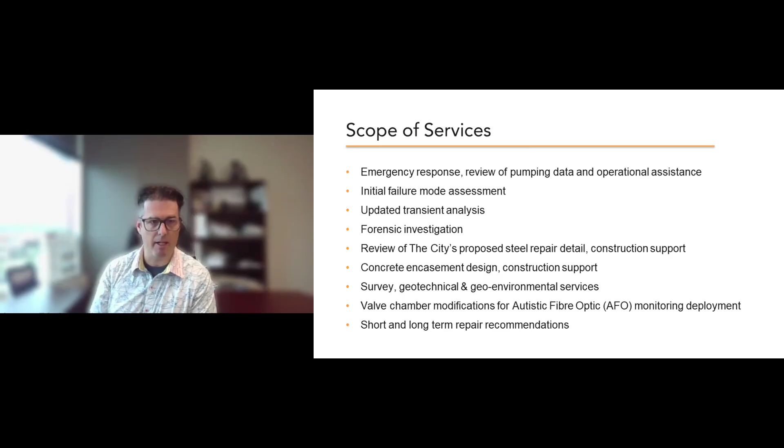Just to give you an overview of some of the key features in this presentation and where this project occurred in general - this is an overview of the City of Calgary. The City of Calgary is serviced by two water treatment plants, Bearspaw and Glenmore, with a combined capacity of about 950 megalitres per day. In general, Bearspaw supplies the majority of the city's treated drinking water, and from that Bearspaw water treatment plant there are three main discharge headers: one to the north, one to the northwest, and the subject of today's presentation, the Bearspaw South feeder main, 1950 millimeter, which roughly connects the Bearspaw water treatment plant and the Glenmore water treatment plant.

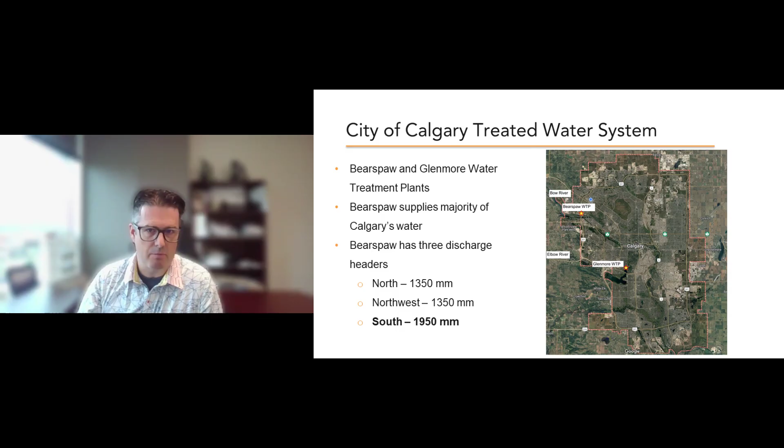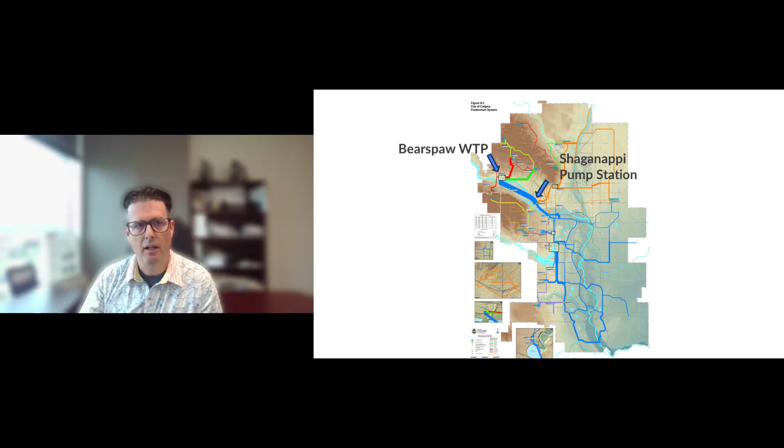This slide is a graphical representation by percent of volume of the overall system. The lines show a graphic representation of how much flow each part of the feeder main transmission system is delivering throughout the city. The Bearspaw feeder main, between those two blue dots, is the largest pipe by volume within the entire transmission network. This is supplying into the Glenmore pressure zone, which covers about 90% of the daily water supply within the city of Calgary. So this would be considered a critical main, a very large piece of infrastructure for delivering treated water throughout the city of Calgary.

Just a little bit more of an in-depth view of the project location. Bearspaw water treatment plant is on the left of your screen, with the red line representing the 1950 or 78-inch Bearspaw South feeder main. A portion of the feeder main is steel pipe, and the other portion we're looking at today is the C301E pre-stressed concrete pipe, which runs for about 8 kilometers through this project area.

Looking at some of the repair locations, the red arrow indicates the June 5th rupture. That was the initial emergency response and the immediate repair to return the system to service. During the initial rupture, other work was proceeding, coordinated by the city, to look into other potential distressed pipes and broken wires within the pipe network.

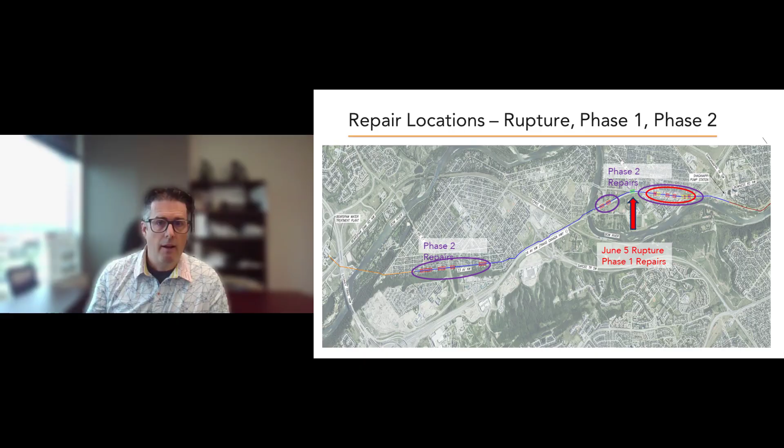This is just a rough overview of the initial June 5th rupture. We then proceeded to Phase 1 repairs, which targeted 5 repairs on another series of pipes demonstrating a large number of wire breaks. Further rollout looked at additional distressed pipes with a large number of wire breaks in Phase 2. Finally, Phase 3 was on the 1500 millimeter or 60-inch section of the pipe, further east of the Shaganappi pump station. This was completed last; 2 segments of pipe were repaired there.

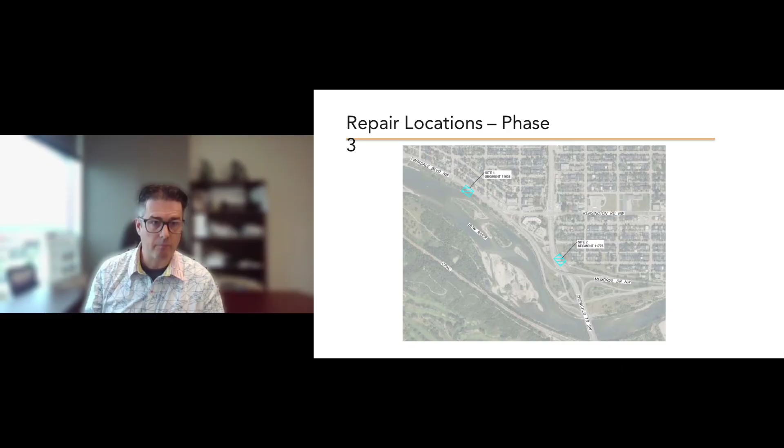Looking at this pipe - this is not the pipe that ruptured, but a typical example of the pipe that is the subject of the presentation. It's C301E pre-stressed concrete cylinder pipe, and this particular pipe was manufactured in 1975.

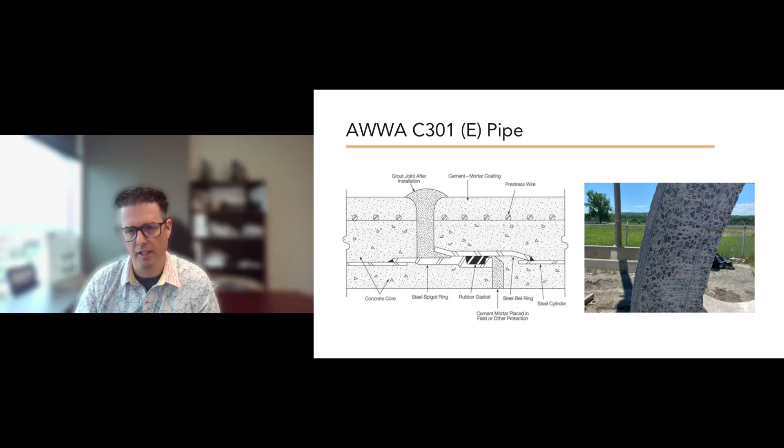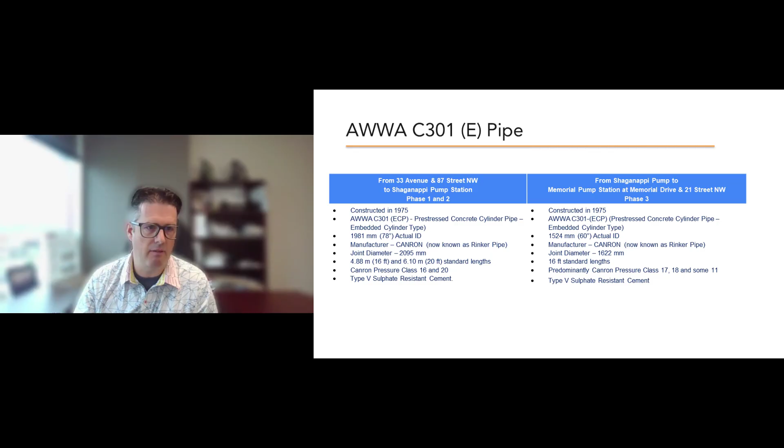Just a little bit more detail on these pipes. Constructed in 1975, the Bearspaw feeder main - the main portion - is 78-inch, manufactured at the time by Canron, and there's also the smaller diameter pipe further to the east, the 1500 mil, 60-inch Canron PCC pipe, supplied in various lengths.

Getting into a little bit more detail on the June 5th rupture: on the afternoon of June 5th, I recall leaving a golf tournament, and some interesting tweets started hitting the news - X posts showing murmurings that something was going on in the system, something not like your typical water main break. On June 5th, there was a catastrophic event that caused a rupture in the Bearspaw South feeder main. AE was contacted by the city, and we were able to attend site immediately and start supporting the city in trying to determine what happened, and supporting the investigation and repairs.

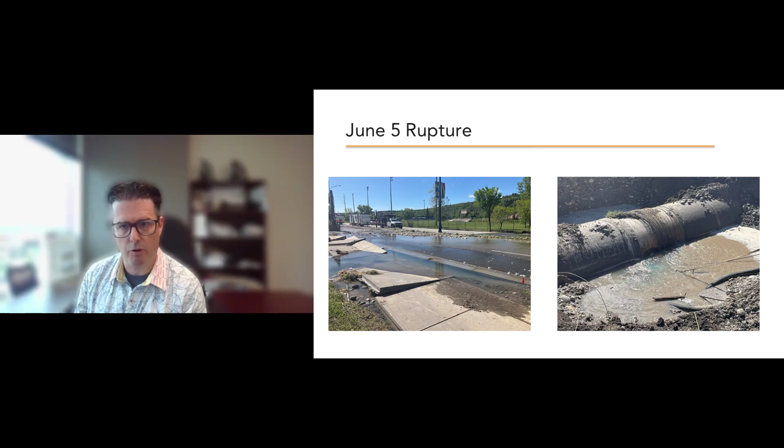These pictures show 16th Ave with the water surcharging to the surface, and also a picture of the distressed pipe with the rupture. Once all the water got pumped down, we started getting in close up to the pipe, looking at the wire breaks, looking at the damaged section of pipe, and starting to gather information to support the forensics investigation.

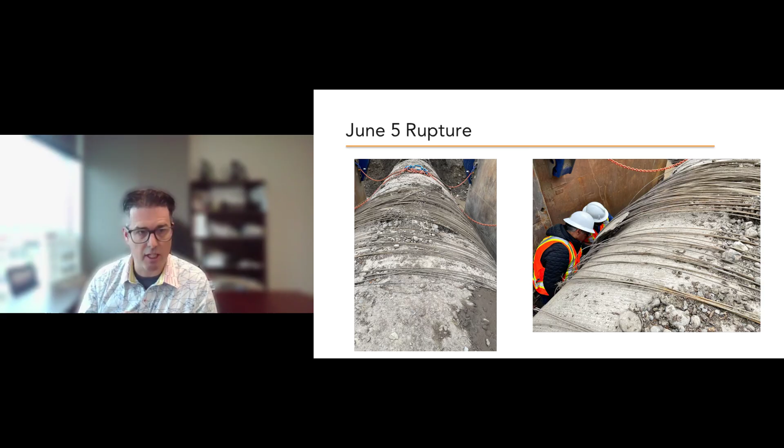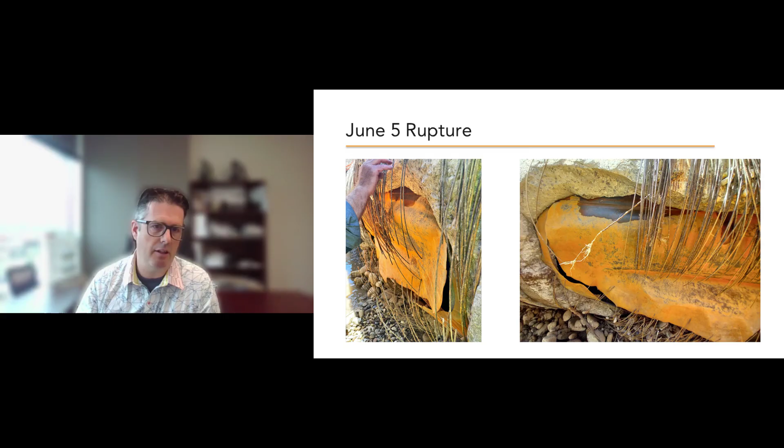Looking at where the pipe failed, we found a crescent-shaped tear at about spring line on the pipe. With the rupture itself, about 200 pre-stressed wires were found to be broken. It's not able to be definitively determined how many were broken before versus how many were broken due to the rupture. But you can see here the rupture from the steel can within the pre-stressed cylinder pipe.

So again, we were able to finally get the pipe out of the ground, looking at it in a little bit more detail here. So this is the pipe segment that ruptured, that crescent-shaped tear just below spring line. This pipe was taken to one of the city's yards for further investigation, sampling the mortar, sampling the steel, doing a full suite of material sampling, so that additional forensics testing could be completed to determine the cause of failure.

In parallel with that, and touching on some of the other support that Associated was providing to the city, we wanted to look into the pump data leading up to the event. Was it a pump failure? Was there a pump that kicked on or off suddenly? Was there a transient event?

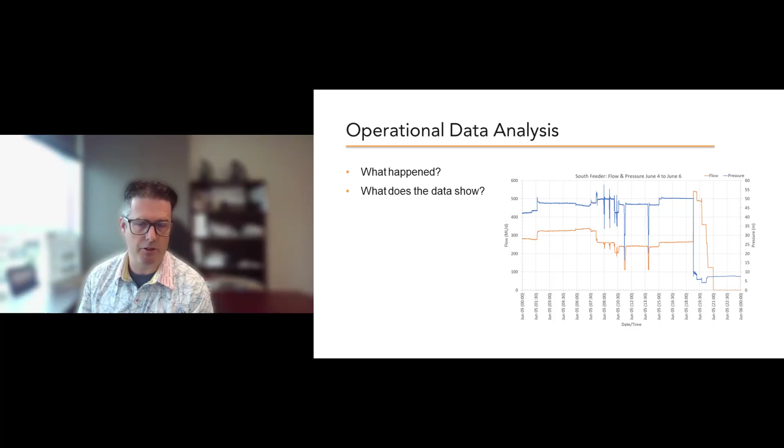So the city was able to provide us their pumping data. Upon review of the pumping and the transient, we were able to determine that the rupture, the June 5th event, was not due to a pumping occurrence or a transient event. So those are some things that we were able to review and initially rule out.

So some of the first very immediate needs, obviously, we needed water. Pretty much immediately, there were water restrictions enacted by the city, but at the same time, we needed to get water into different pressure zones, keep water in the system, keep the taps on to some degree as much as possible.

So with AE's recent experience in the city at Bearspaw Water Treatment Plant, and also Shaganappi Pump Station, we were able to support the city in reviewing bypasses within pump stations. We were also able to leverage our recent experience to get some plans put together quickly and get into construction. And also knowing the system, we were able to install a pressure reducing valve to be able to operate the system in emergency operations.

So on June 6th, we got into Shaganappi Pump Station and were able to identify ways that they could change the operations, run water backwards, if you will, and be able to supply some of the different pressure zones in different ways and keep water going to the pressure zones and the different reservoirs throughout the system.

One of the solutions that we developed in the North Hill bypass, getting water to pump station 32, we actually straight lined a pipe. Normally there would be a pump at this location, but we were able to identify that if we removed this pump and straight piped it through the pump station, we'd be able to run the water backwards and still provide water into one of the pressure zones. So that was leveraging our recent experience and support on a variety of different city water projects.

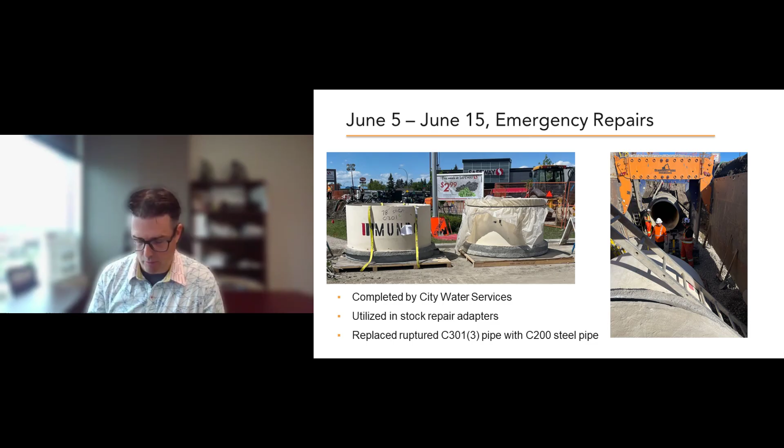While this pipe was out of service, the city also began to collect other information from within the isolated portion of the feedermain. At this time, they were able to deploy Pure Technologies, who did electromagnetic scans of the pipe. During this initial window, the information was collected that indicated there were other distressed pipes with significant amounts of wire breaks within the system. And the city started to develop their plans to complete subsequent repairs on additional pipes.

Once those additional 5 locations were identified, the city developed their own detail that they looked to AE to complete reviews on. This was going to utilize welding donuts into the bell and spigot of the existing C301(3) pipe, and then transition to C200 steel pipe. The supplies for this were all procured by the city.

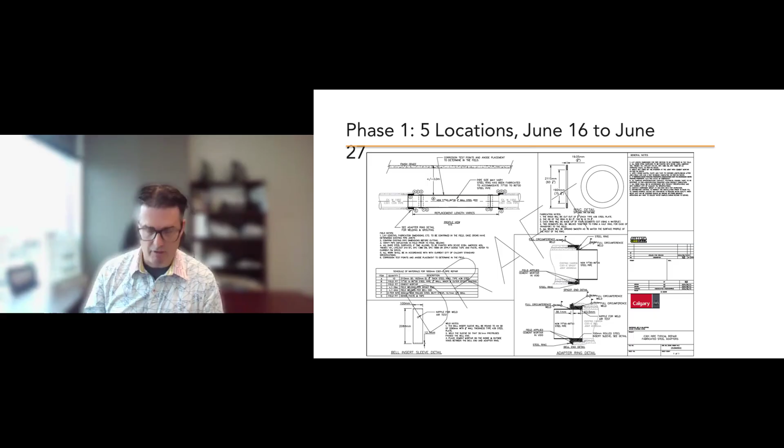As I mentioned, while the initial rupture and the out of service was in place, the city completed electromagnetic scans of the pipe. This was achieved, since there's no water in the pipe, by dragging through electromagnetic equipment by Pure Technologies. And through this, they were able to identify pipes that needed to be repaired based on the number of wire breaks.

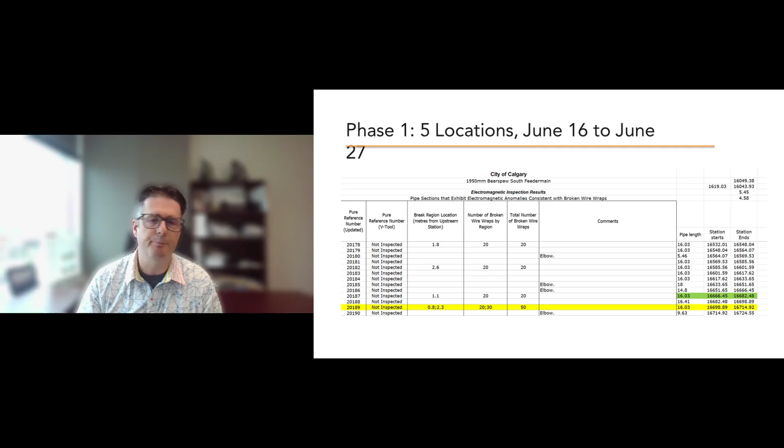Taking this information, AE needed to translate it to the field, right? So this is collected in the ground, but we needed to know, where are we going to go dig? Where are we going to go find these pipes? And so one of our initial tasks was going through. The city did have all the original layout drawings of the Canron pipe that we were able to review and look through the Pure data and correlate drain points.

There were obviously a lot of valves, but there's drain points, other features on the feedermain system, air valves, things like that. And from those points on the lay drawings, the Pure Technologies information, and then field checks, we were able to go out and lay out and say, dig here.

I recall one of the most nerve-wracking things was showing up on June 16th. The city had already lined up all their contractors in place to complete the emergency repairs. They were already digging. They had a rough idea of where their pipes were, but we kind of viewed this as, you only have one chance to get the right pipe. We didn't want to have to dig twice on anything.

So contractors are already on site, asphalt's out, already starting to dig, and we're running up and down the street with Pure, with drone surveys, trying to take the information from these old drawings, which are in feet and inches, the other data that's in meters, and trying to lay everything out and get the pipes right and make sure that we're digging and repairing the correct pipes.

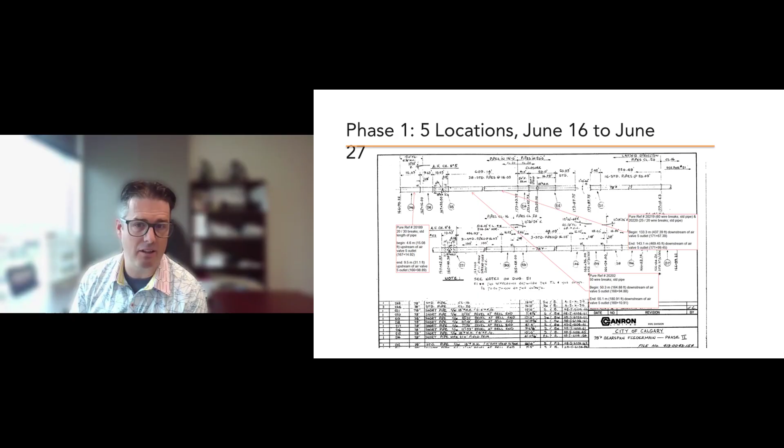Another reason why this initial layout was important was to support our forensics investigation. So we had identified these distressed pipes that were going to be replaced with sections of steel, but at the same time, we wanted to exhume and extract these segments of pipe so they could be taken off site for further forensics analysis. So once we determined which pipes, we also laid out the zones where we did not want any cuts. We wanted to try and exhume these as intact as possible for future investigations off site.

And then you can see here, in addition to doing the survey layouts and things like that, Pure also came back onto site and completed additional EM scans to make sure the number of wire breaks that we were seeing from the internal scans and the pipe diver were matching the signature of the pipe on site.

And through all the phases, there was a total of 3 phases, 29 locations total. We were successful in locating and digging on the pipe 29 out of 29 times. So it was pretty nerve-wracking, but was successfully executed.

Again, supporting the city's forensics investigation, we were completing site observations of the in-situ pipe, making observations, collecting mortar samples, looking at the wires, just trying to collect as much data as possible to help support the forensic investigation into why this might have occurred.

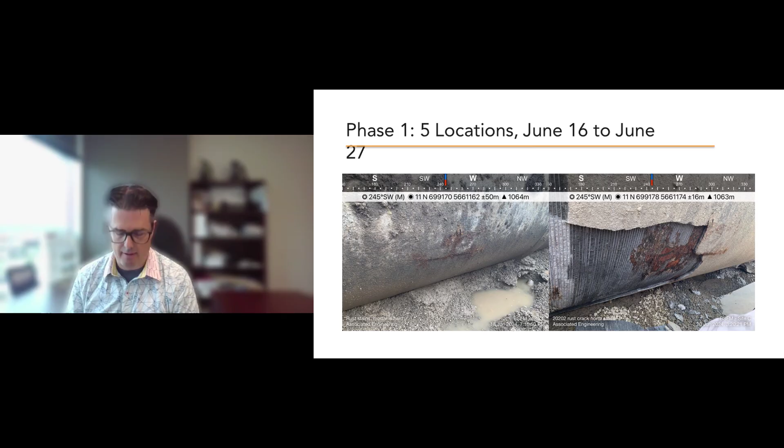In addition to this, Corrpro was on site looking at resistivity, stray current analysis, things like that. And then Thurber was supporting AE as well to collect soil samples for testing for chemical properties.

Looking a little bit more along, when we started to dig out the pipe and get it ready for replacing with steel, one of the things that I learned through the course of this project was the amount of time that it took to chip out these diapers. So the mortar that was applied at the joints, you can see in the lower view of the slide on the left, the concave at the joints, those are referred to as diapers. That was very high strength material. And I give credit to all of the crews, working so carefully to protect these joints.

So they needed to chip out these diapers while not damaging the existing bell and spigot, because that's where we were going to weld the donuts in and weld the steel pipe right into those bell and spigots. So a very careful exercise, very time consuming. This was probably the activity that took the longest.

I think up to 24 to 36 hours to chip out each diaper, multiple crews getting in there, and just really tough work. And that probably took the longest out of any of these site activities.

So once the diapers and the pipes were removed off site, the steel pipe was brought onto site, lined and coated. You can see the adapters that were fabricated, welded right into the existing bell and spigot. So C200 pipe dropped in there. The closure was completed with butt straps. And then in addition to the lining and coating, everything was Densyl mastic before backfill.

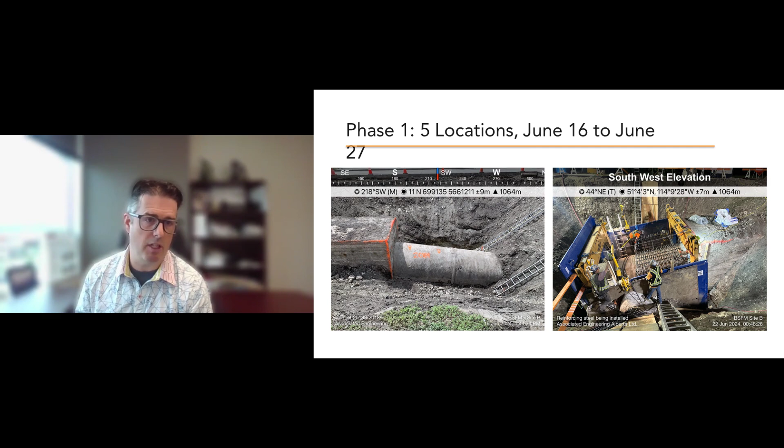And as we move into the phase 2 repairs, this was what we applied for 21 additional locations. So after the initial phase 1 repairs were completed in June, we had time to reconfigure, come up with more plans with the city and their contractors, and starting at the end of August, we deployed to complete repairs at 21 additional locations. At this point, the city brought on Graham Contracting.

So the phase 1 repairs were completed by 4 separate contractors working directly for the city. But for these phase 2 repairs, it's a very wide area, multiple work fronts. You're within residential areas, commercial areas, a very high density urban area. They brought on Graham Contracting to act as a general contractor for these 21 sites for the overall program.

AE's services in the phase 2 repair. As I mentioned, we prepared the concrete encasement details that were going to be constructed around the existing pipe. So we needed to support the existing pipe in place. So we also looked at the support details and how much deflection, we're trying to avoid having any deflection, obviously, but coming up with your minimum deflection and providing the requirements to the contractor to make sure that it's properly supported in place at all times, so the concrete encasement could be constructed without compromising any joints and loss of integrity.

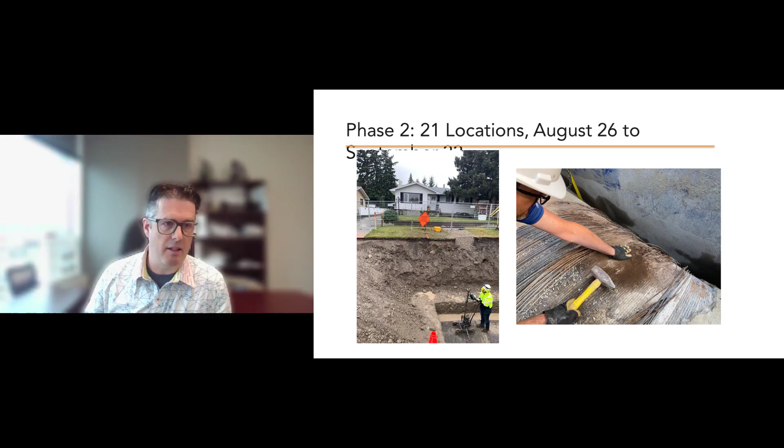We did have a video planned, but unfortunately due to technical difficulties, the video is not available.

Just looking at a bit more detail of phase 2, so 21 locations over a wide area. Graham came up with the work plan to phase and stage all of these work areas. They assigned the work to 4 different civil contractors who were responsible for excavating and exposing the pipe, and then Graham themselves performed the services to place the rebar, place the concrete encasement, things like that. The shoring system that was installed was used as part of the formwork, which worked out quite well.

So these are obviously pretty large rebars. And I recall when these shop drawings came out, we had to work with Graham quite a bit to find all the available rebar. I recall there were many calls, where are we going to get all this rebar? There's rebar couplers, all these different pieces that we needed to get on very short notice. I think this is 400W rebar.

I think we got every piece in the province or something like that, getting it shipped down to Calgary on rush delivery, and then getting a crew in there to bend it all, get it all in place, and everything came together seamlessly, it was executed very well.

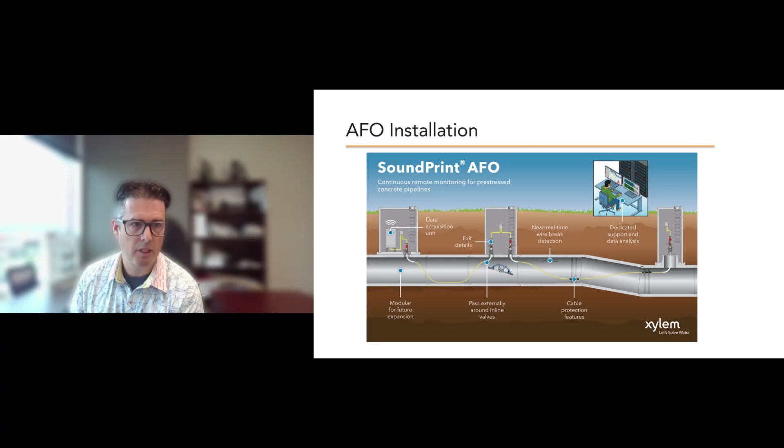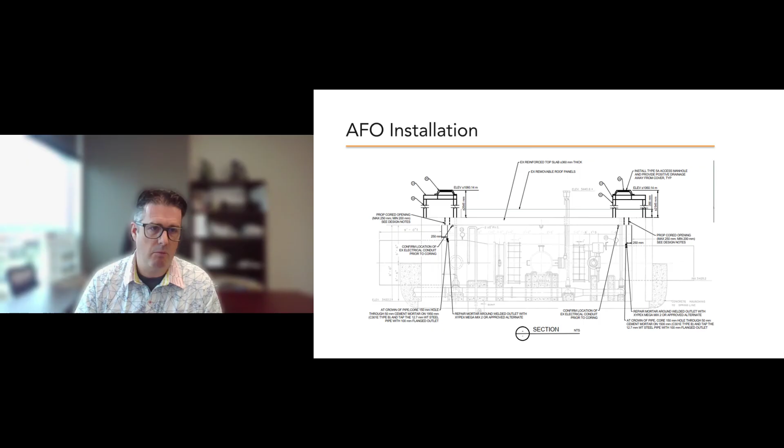We helped the city, I think it was five different locations, modify existing valve chambers, complete cores into the valve chambers, put manholes on top, support the city with positioning the fittings and things like that within the valve chambers to be able to deploy the AFO monitoring.

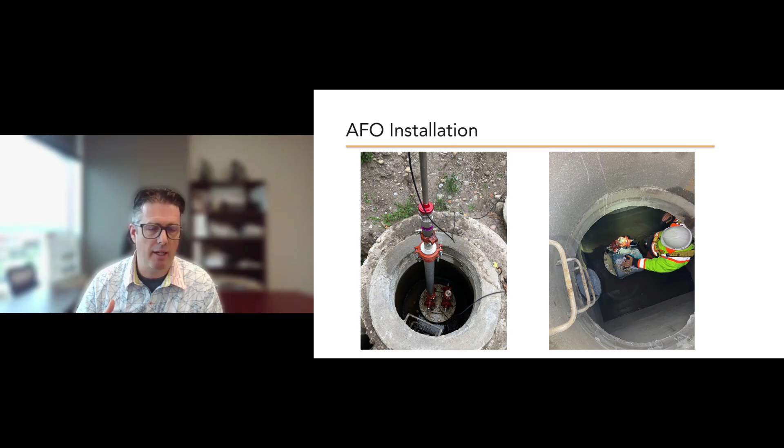And then, we call these things the plumbing stack. So they were attached to different blind flanges, different air valves were removed, things like that, to be able to deploy the AFO cable within the feedermain, pull it through, get it to a monitoring station, and get it up and over the different butterfly valves that were within the system.

I have this one as takeaways. I'm still learning from this project. This could have been lessons learned, I guess, but kind of my own personal takeaways from this is the safety. Safety was paramount at all the meetings. That was very key. The city had a great overview on all the safety throughout all of the phases.

This work was completed as 24/7 emergency repairs. There was crews working night and day in busy areas with lots of public, and successfully completed with no major incidents. So a huge credit to the city and their contractors for working safely throughout.

It was really neat to work on this project, all working towards one common goal, which is returning the water to service - the city, the contractors, the consultants, everybody. It's really neat to see that team attitude, and it was a really neat experience.

Communication - so early and often communication, not relying on email. We were in the field, we're making decisions in the field, we're in site trailers, everything happening in real time. And then just having that internal and external communications at all times.

With any kind of major field activity, obviously having that office support as well, and then the backups and things like that. So having plans for cross training, cross shifts, having your backup, the person who's going to cover you, and making sure that you're able to have those handovers.

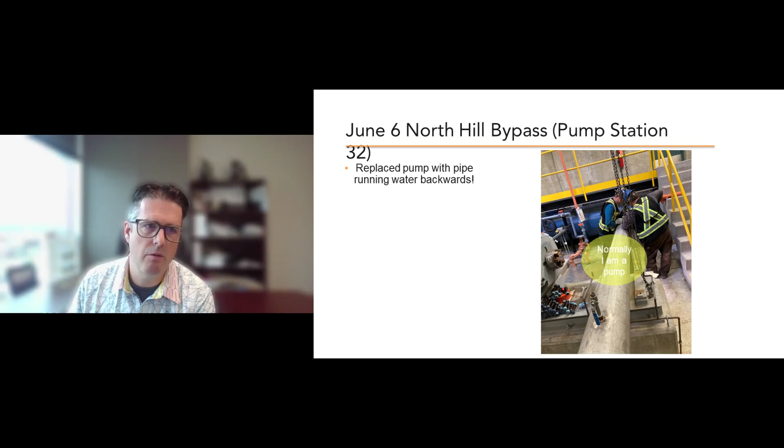And so that was led up by our process mechanical group, Joe White, with direct hands-on experience and knowledge of the pump stations.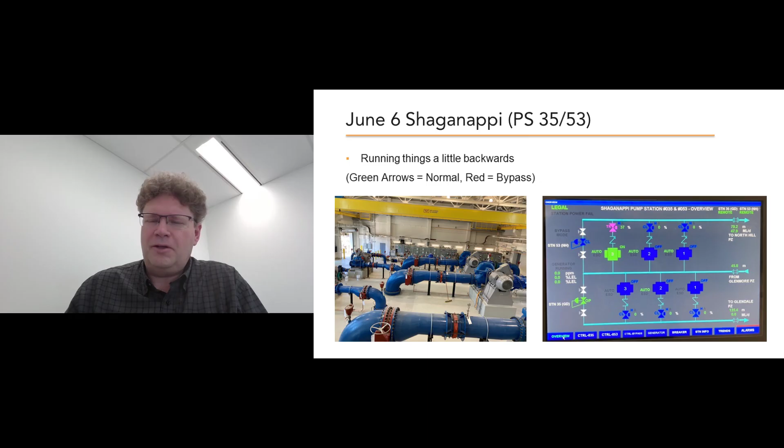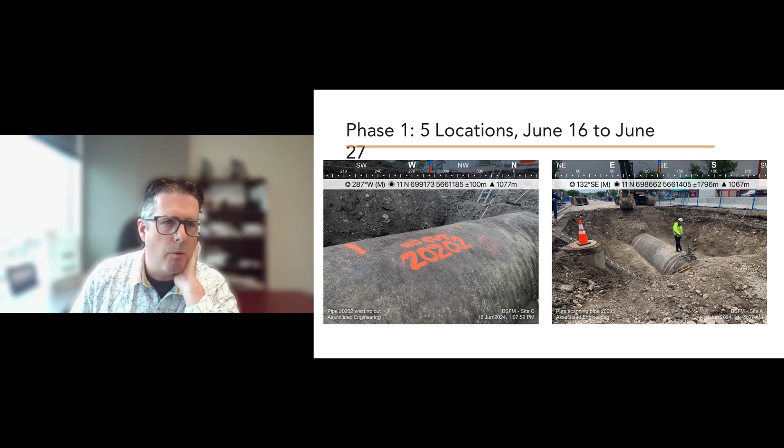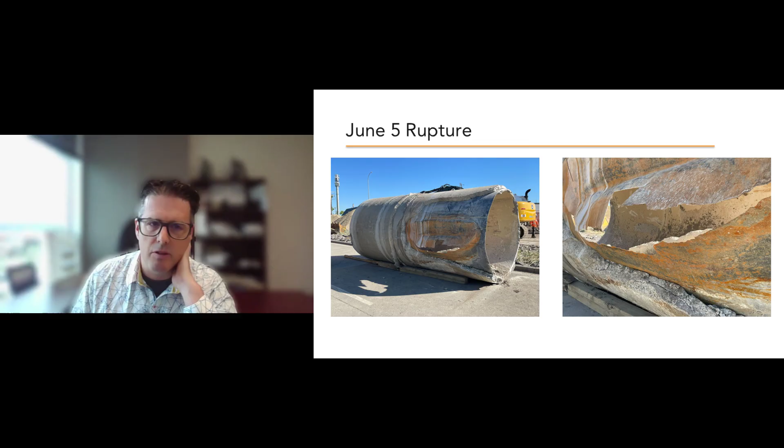What kind of saw was used to cut the pipe, like a normal concrete saw? On the initial break, I wasn't involved in the initial rupture and cutting it out, but I know one of the contractors brought out a high pressure water jet cutter to remove one of the pipes. Typically, aside from the initial rupture, the contractors' process was to chip out the diapers and then pull the pipes out. There was some cutting, but it's typically done with typical saw cutting equipment, pulling out the first section of pipe, getting at it in smaller pieces, bringing it to the surface, and cutting it there rather than in the trench.

On the concrete cylinder pipe, is there cathodic protection on that pipe? No, there is no cathodic protection system there. But on the new replacement pieces, I believe there was cathodic protection added. Yes, I believe so, though I'm not 100% sure, since there's no existing cathodic system. But I do recall the city had cathodic staff on site to test for that.

There is the steel system, right? So the steel system does have cathodic protection, and people were wondering whether any cathodic current was being put through the system from the cathodic protection on the steel. I think each section of new steel pipe that was added had some anodes added - buried anodes and test points put on the steel pipe. But I don't know if it was integrated with the rest of the system, or just each section individually.

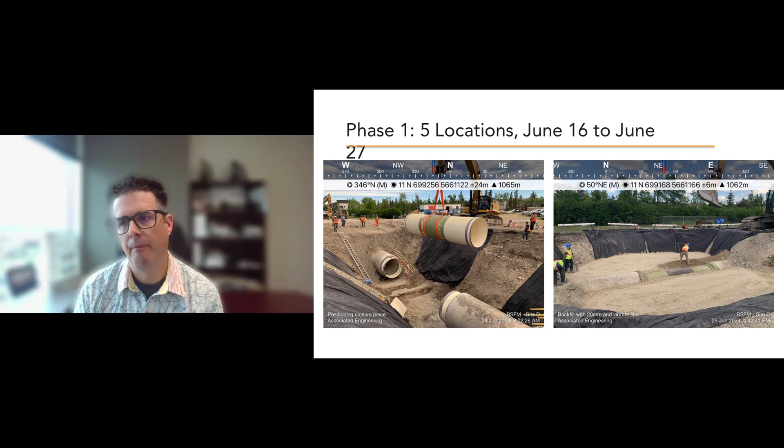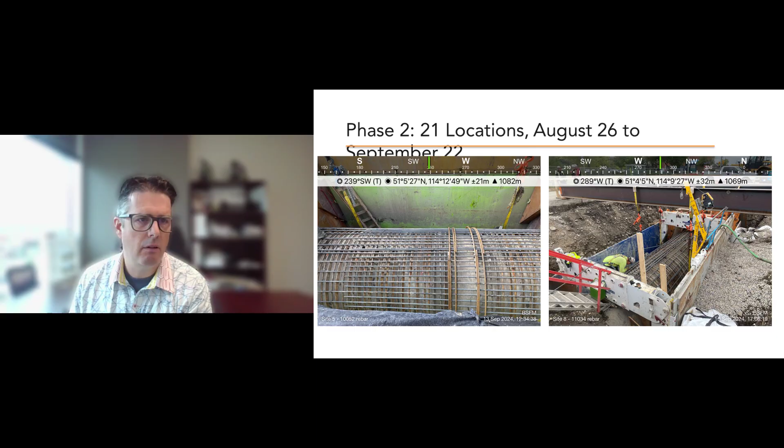What were the specifications in terms of strength on that concrete? I don't know off the top of my head. How far below the pipe did you go? I'll bring up the detail - I think it was about 500 mils on all sides. Our structural engineers came up with the detail. I can't recall the concrete strength, but the majority of the strength came from the rebar design - very heavy rebar reinforcement. I'm not recalling the concrete mix design strength, but it was about 500 mils all the way around.

Can you comment on why we went with the concrete encasement option as opposed to other rehabilitation or strengthening options? I think based on the number of repairs - 21 locations - and from the experience gained in the first one, it was something that could be replicated and repeated to a certain degree, fairly cost effective, with reasonably local materials available and contractors in place. With the staging and other requirements, it was determined that this would meet the schedule.

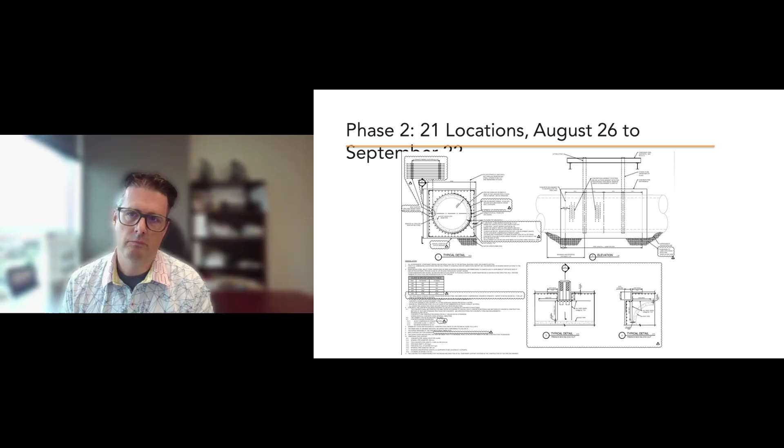Very good. Lots of questions here, and some dialogue also. Dan Nelson, City of Calgary, there was a question related to the cathodic protection, and he confirms here: no cathodic protection on the concrete, but anodes on the new steel pipe. So thanks for that, Dan.

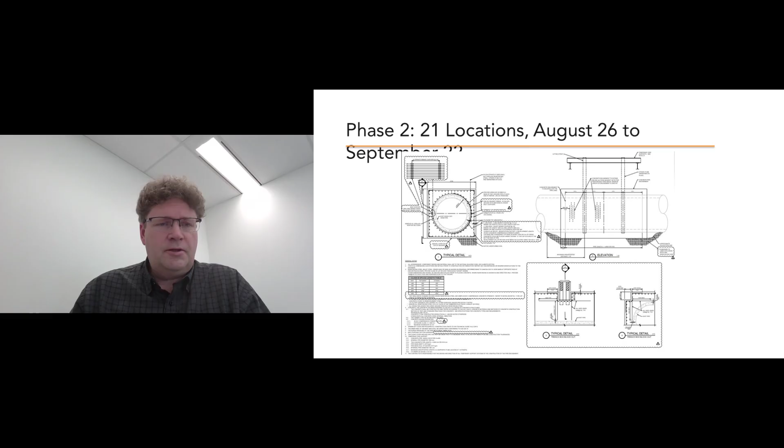There was another question about the backfill around the cast-in-place repairs. Was there any special requirement for the backfill in that area afterwards? No, there was not. It doesn't have a photo of it, but the video would have shown that it was all backfilled with fillcrete. You can see, around the trench box, they were using soil bags, cubic meter bags of sand and gravel, to protect the trench. Those gravels were removed out, and everything, the concrete encasement, was all backfilled with lean mix or CLSM concrete.

We'll see, I'm not sure if we can answer this one or not. Was there any issues in terms of isolating the feeder main, say valve operations, those kinds of things? No, not that I recall. It was successfully isolated using the valves that were in the system.

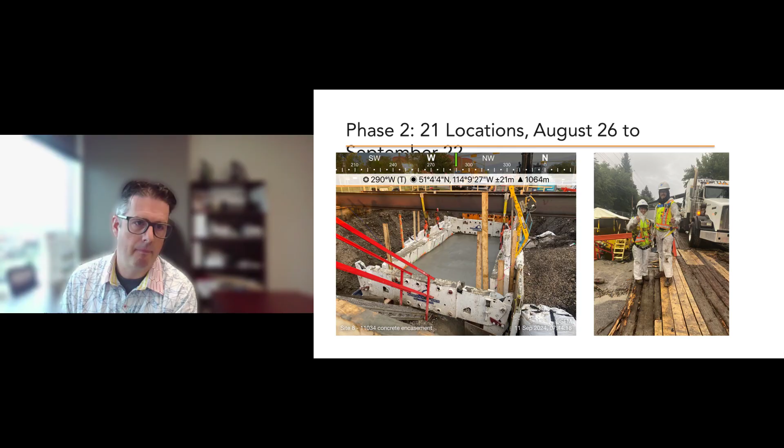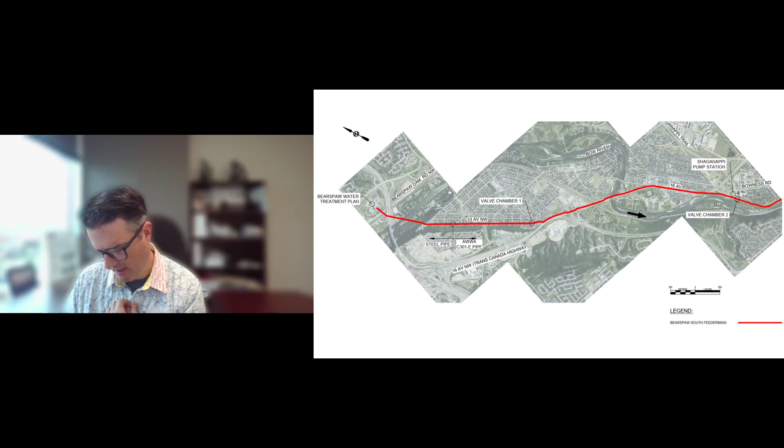So yeah, there's valve chamber 2 here, and there's another valve chamber further to the east, valve chamber 3. I can't recall if that one was closed or not, but there was no issues to isolate it after the initial repair, after the initial rupture.

So this pipe here is a little bit over 50 years old, but we didn't install any new valve chambers as a result of this, correct? Correct, yeah, no new valve chambers.

Some of the additional work that took place in parallel with this is that there were a couple of cross connections to the distribution system, and while the pipe was out of service, the city replaced all the valves on the cross connection. AE supported that design and replacement as well. These are connections to like the 400 mil, 300 mil distribution system cross connections.

And then I guess the second part of that question, and this was an emergency kind of response as opposed to any long-term planning, but can we comment if there's any additional thoughts about adding additional valves in the future to isolate these mains?

Yeah, that'll be on the twinning. So the twin trunk that the city's designing right now will go from valve chamber 2 here to the water treatment plant, and that'll be a new system designed to current standards with all those kinds of requirements. That'll provide the redundancy, and if additional or different kinds of repairs are required on this existing portion, that'll allow the city to go and address the existing feeder main.

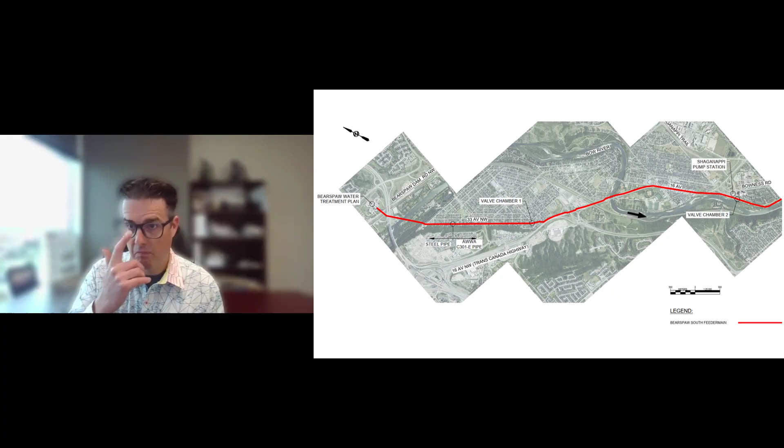There's another question here: in relation to the pipe that was repaired in place, those 21 sections where we put the concrete encasement around, was there anything done on the inside of the pipe, or was the inside of the pipe okay? Yeah, from what we were seeing, inside the pipe was okay, there was no concerns there. From our forensics, it didn't appear that it was anything from the manufacturing process. We didn't find any issues with the lining on the sections that we did remove, obviously.

So in those phase 1 pipes, the first 5 pipes that were removed, the testing proved out that it did meet the C301 design requirements. It was not a manufacturing issue, and we didn't have any concerns with the existing pipe. That factored into understanding how it was manufactured. Obviously there are issues once it went into the ground, but the lining we found, we didn't have a concern there. Okay.

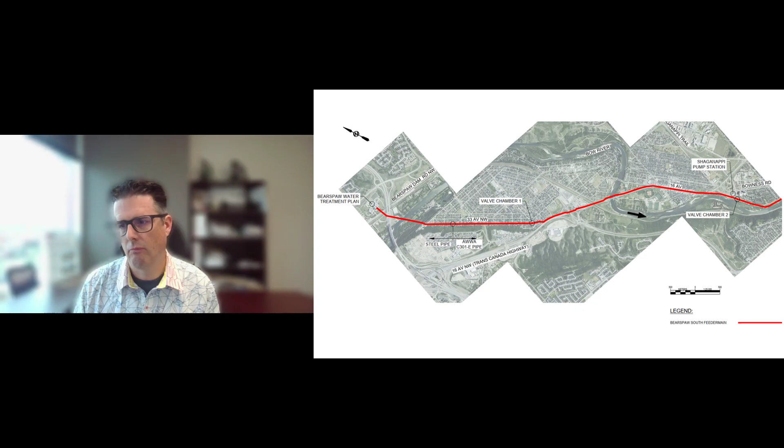Can you comment on how long it took, going back to the phase 2 repairs? There were 21 of them, so 21 pieces or segments of pipe. How long did it take to repair each segment of pipe? Would you say each section took about 10 days?

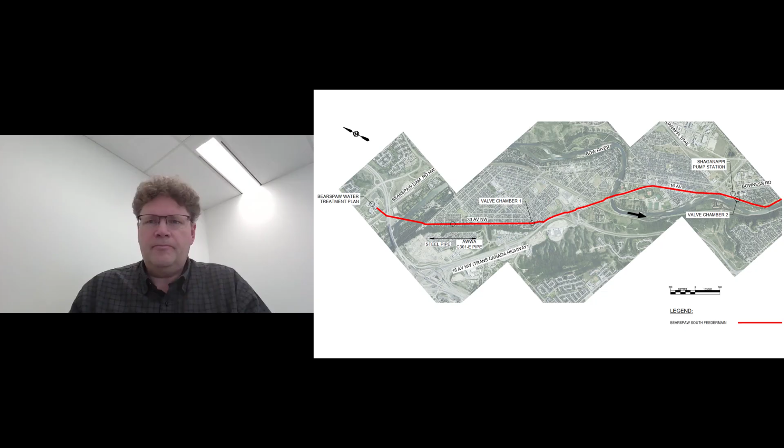10 days. So the phase 2 repairs, again coordinated by Graham, they came up with a work plan to have a minimum of about 4 independent work sites happening at any one time, so they had civil contractors in place to stage and deliver this.

The takeaway I had from this is we're working along the Bow River, an alluvial floodplain. The geology there is a lot of pit run, river run material, and a lot of this was done with hydrovac. The time to hydrovac, especially running into large cobbles and boulders, was a really slow process. But once they got their system in place for excavating and exposing the pipe, working 24/7, it was about 10 days per site, completed overall in about a month timeframe.